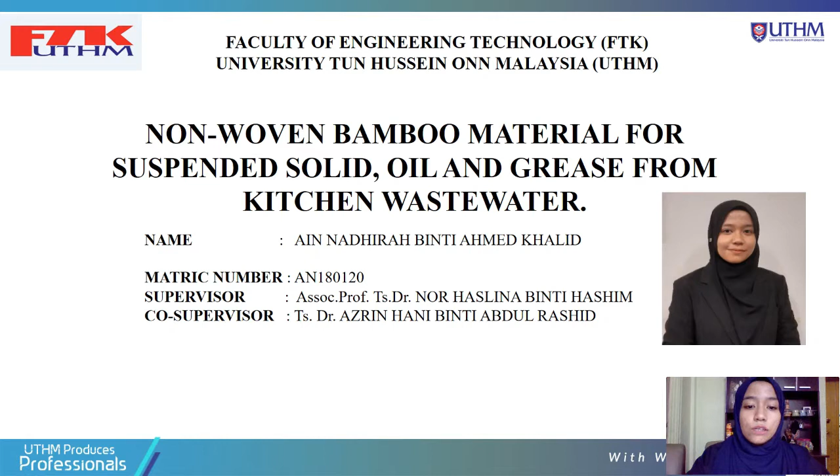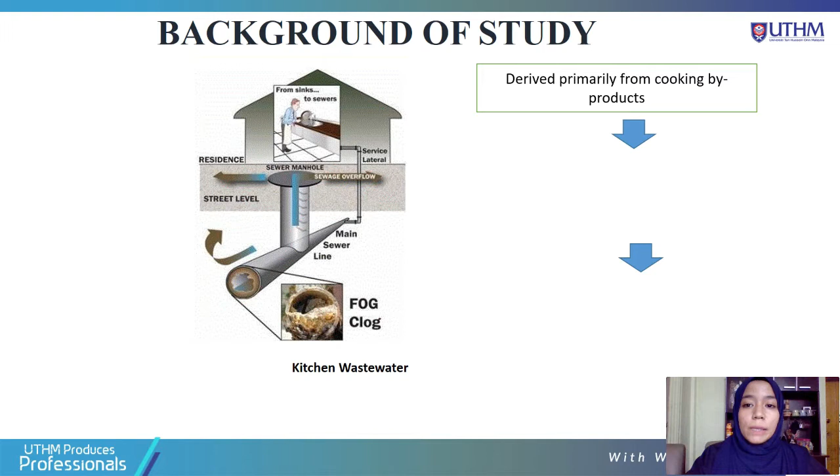For the background study, suspended solid, oil and grease are derived primarily from cooking byproducts. Without proper treatment, suspended solid, oil and grease will deposit and cause sewer blockage due to sanitary sewer overflow, land floods, and sewage pollution of water bodies. And it will affect human health and aquatic life.

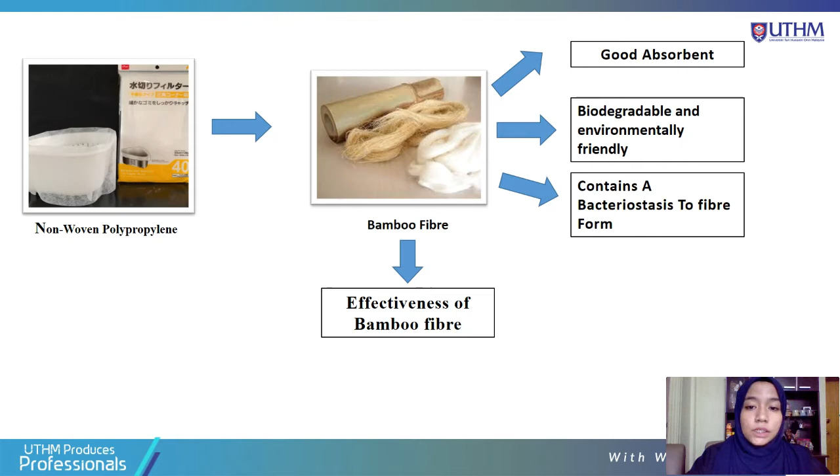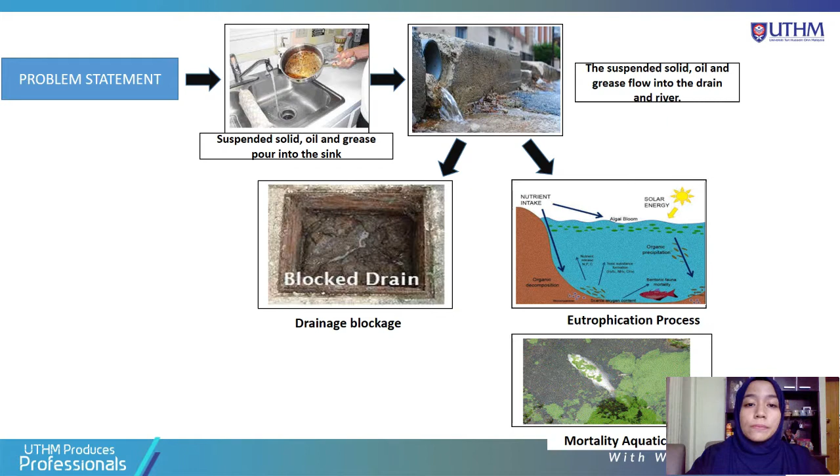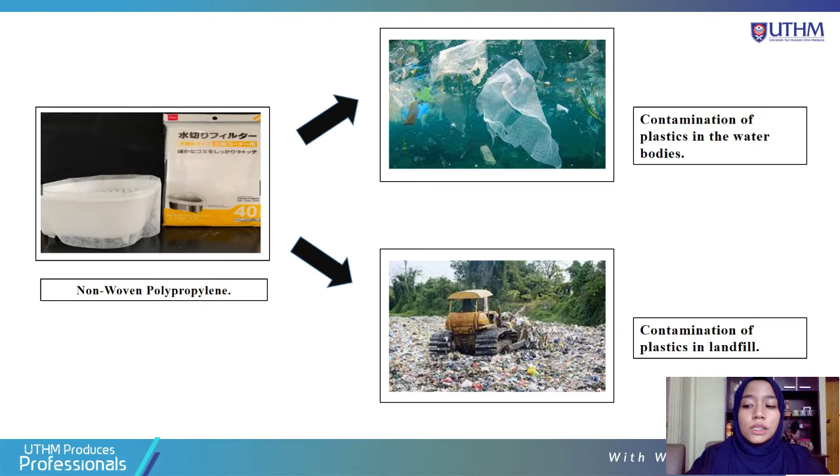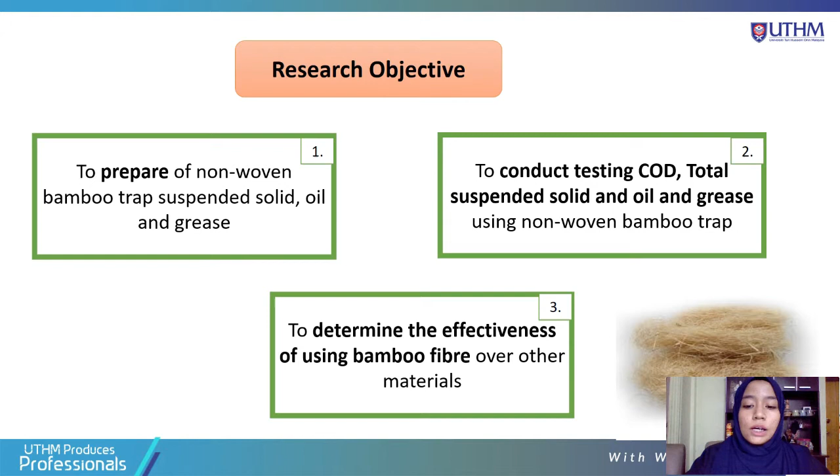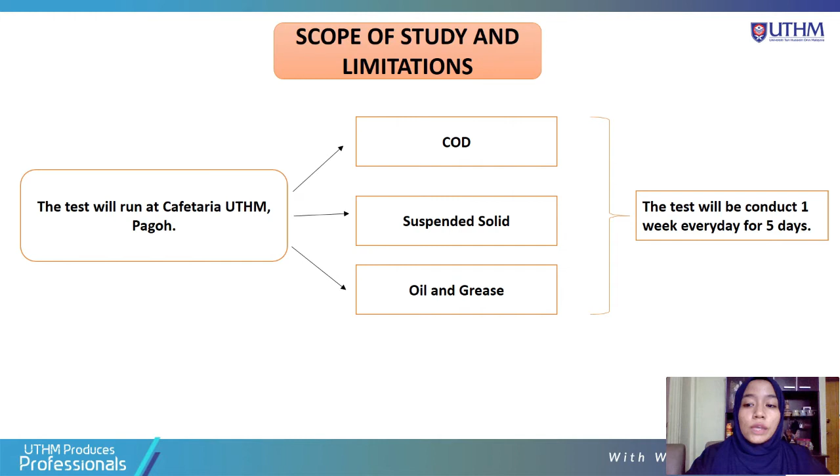For the scope of study and limitation, the test will run at Cafeteria UTHM, Pagoh, and the tests conducted are only COD, suspended solid, and oil and grease. And the test will be conducted every day for 5 days in one week.

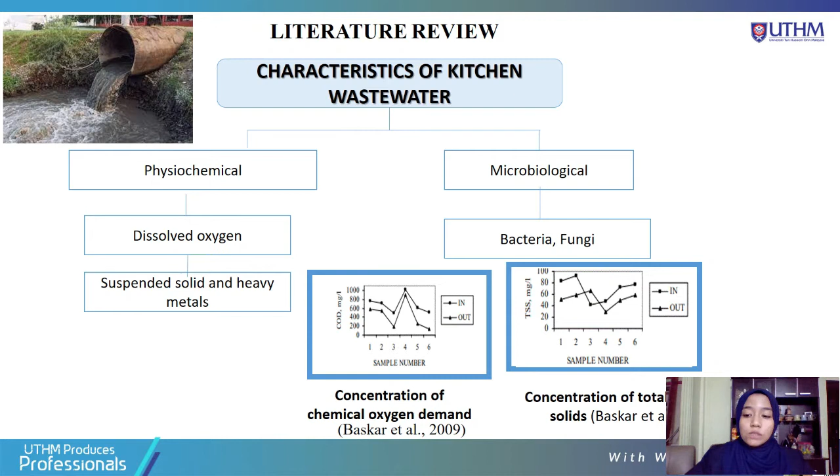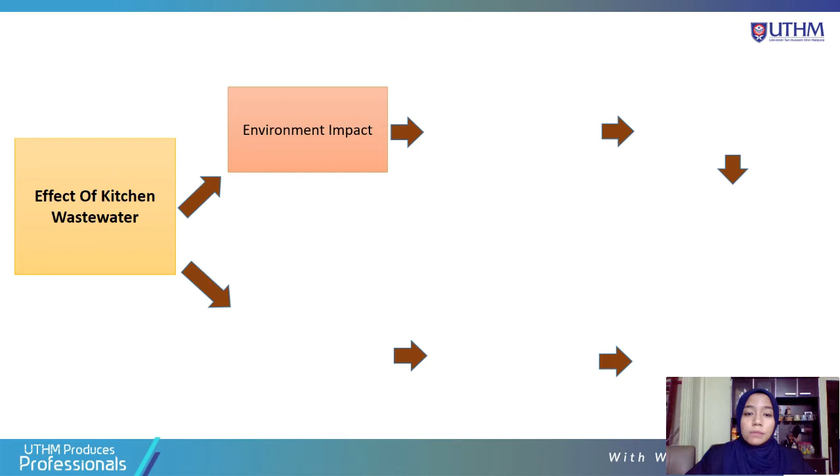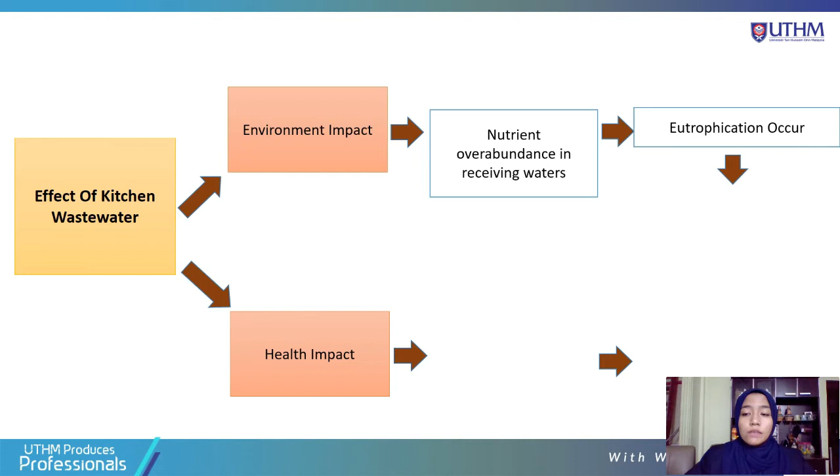For the effect of kitchen wastewater, we have two, environmental impact and health impact. For the environmental impact, it will cause nutrient overabundance in receiving water, such as nitrogen and phosphorus, and it will lead to eutrophication. When eutrophication occurs, there will be mortality of aquatic life, such as fish and plants. And for the health impact, when E. coli and Salmonella are present, they will cause diseases with symptoms such as vomiting and nausea.

For the pre-treatment of kitchen wastewater, how to conduct pre-treatment in the kitchen wastewater: first, use a suspended solid, oil and grease trap. Then, sort and remove the large debris. And the last one, never pour oil or fried oil down the drain line. So, this is an example of pre-treatment of kitchen wastewater.

So, these are the methods available for suspended solid, oil and grease, such as the Trapzilla supercapacity grease trap, Kabok fibre trap, Aqua Biopro, and BioWish Aqua.

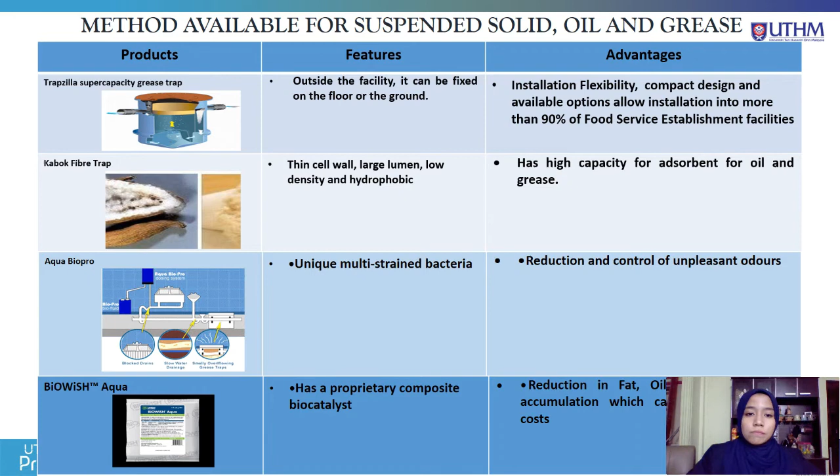So, what is the advantage of using a pre-treatment trap in the kitchen? First, it prevents suspended solid, oil and grease buildup. It avoids blockage in the main sewage pipe. Other than that, it's economical. It helps to save money on sewer maintenance and repairs. It also prevents the enterprise from temporarily closing due to odors or blockage.

And the last one is that it's environmentally friendly. It prevents nutrient-rich overspill into our waterways, providing a healthier atmosphere for future generations.

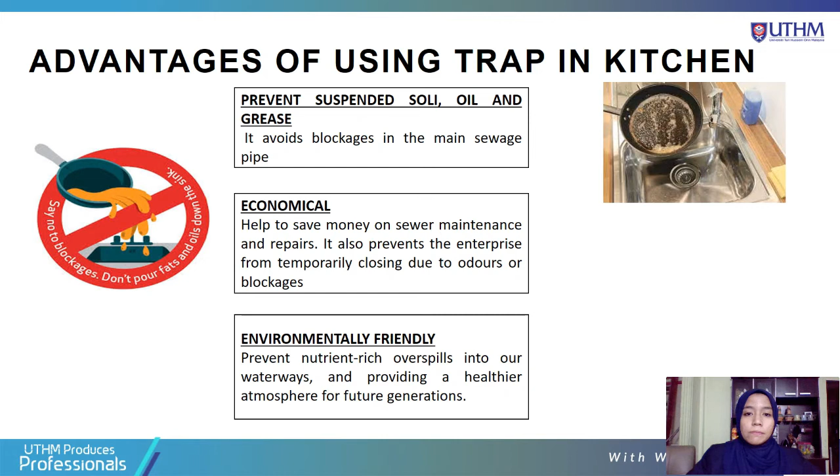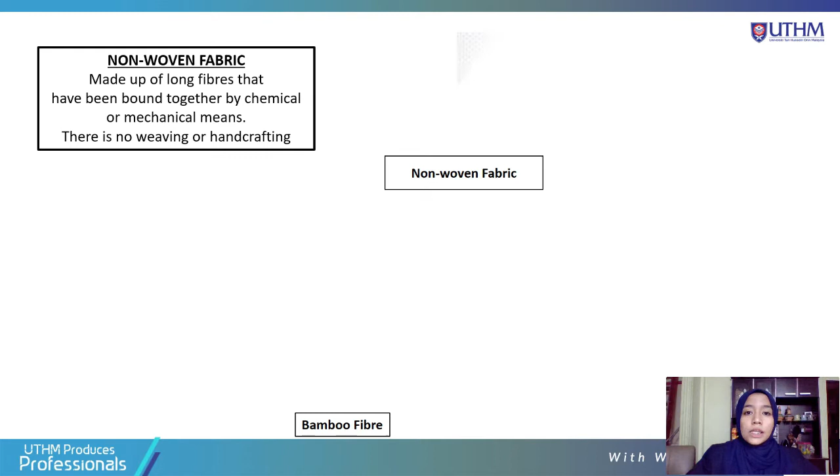So, in this project, I would like to produce a non-woven bamboo material for suspended solids or grease for kitchen wastewater treatment. So, what is non-woven? Non-woven is made up of long fibers that have been bound together by chemical or mechanical means. There is no weaving or handcrafting. This is an example of non-woven fabric.

What is bamboo fiber? Bamboo fiber is from bamboo plants that are cultivated spontaneously, and cellulose fiber manufactured from the pulp of the bamboo plants. The bamboo is a plant that can be cultivated in deprived areas, and it takes little time to mature.

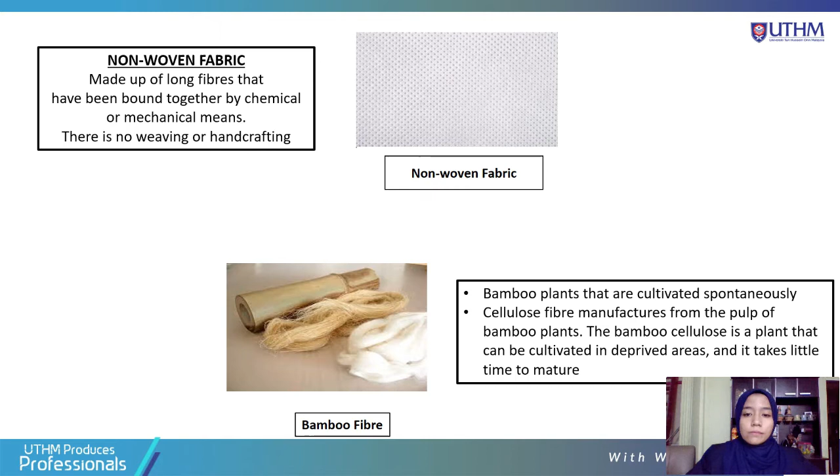So, what are the features of bamboo fiber? The first one, bamboo fiber is absorbent of UV radiation. Bamboo fiber contains sodium copper chlorophyllin. Other than that, it is biodegradable and environmentally friendly. It produces no hazardous waste and saves landfill space. Other than that, it contains bacteriostasis in fiber form. Bamboo has antibacterial qualities and includes natural antibacterial components.

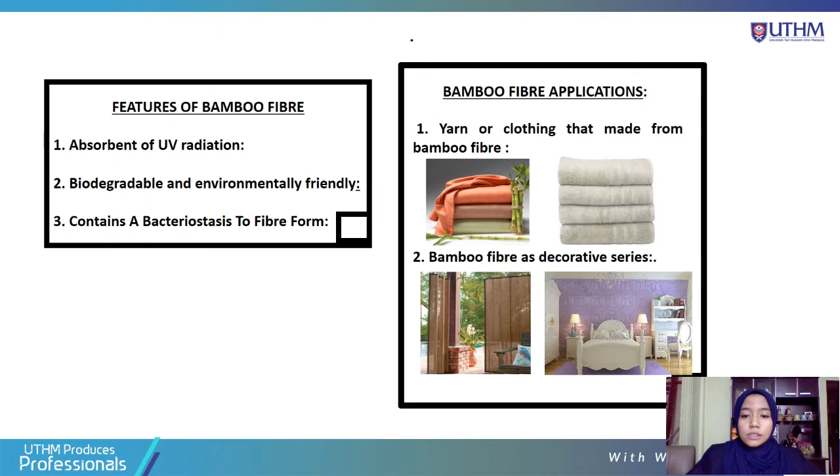So, what bamboo applications are available in the market? The first one is yarn or clothing made from bamboo fiber, such as towels, t-shirts, and others. Other than that, bamboo fiber is also used as decorative series, such as curtains and walls.

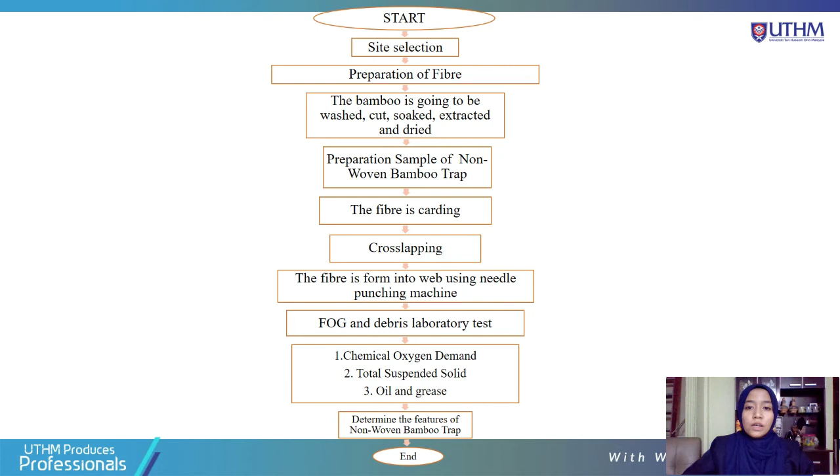This is the methodology of the process of non-woven bamboo material for suspended solids or grease for kitchen wastewater. Preparation of bamboo: first, the bamboo is washed, then it is soaked, then extracted, and the extraction goes further to the drying process. Preparation of non-woven bamboo: the fiber goes to the carding process, then cross-lapping, and the last process is in the needle punching machine.

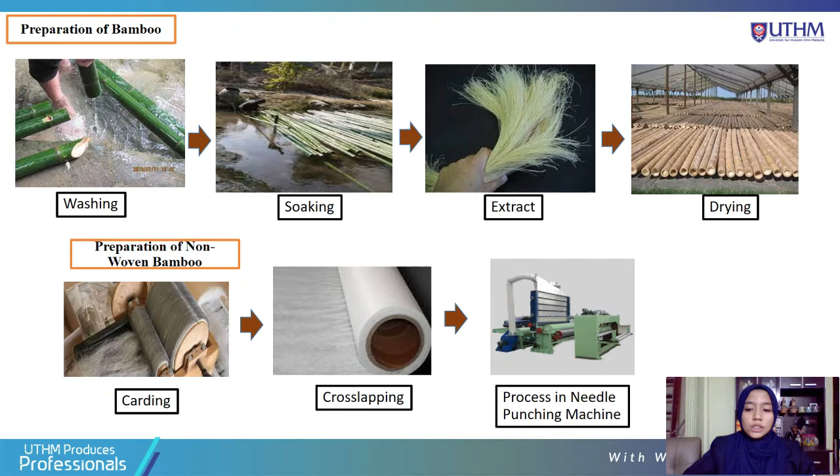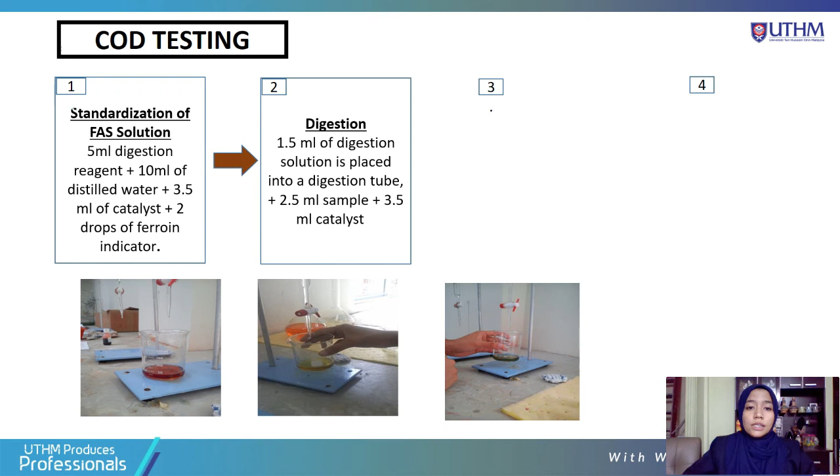In this research, we use COD testing. For the COD testing, the first one is standardization of FAS solution, the second one is digestion, the third one is titration, and the last one is we calculate the COD.

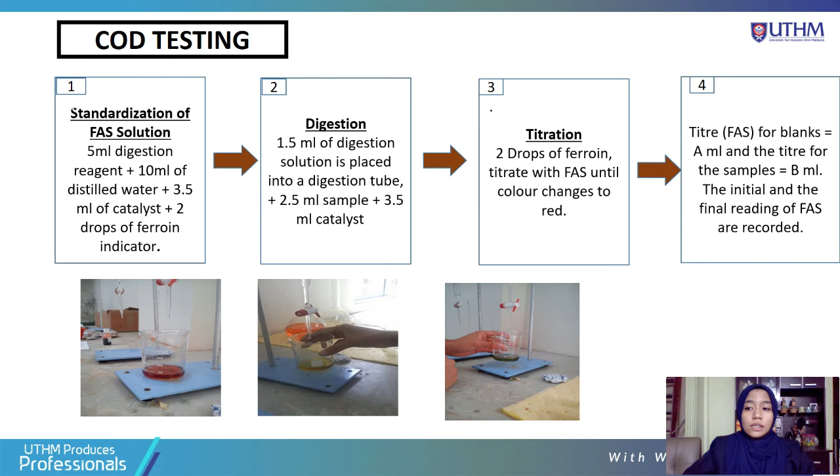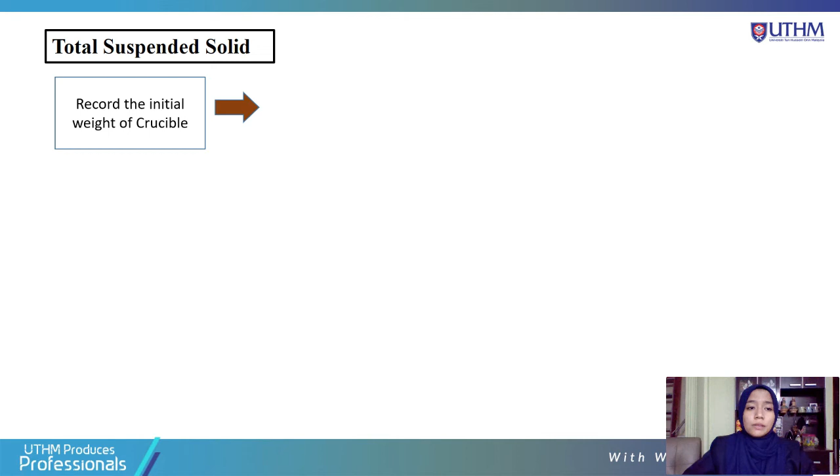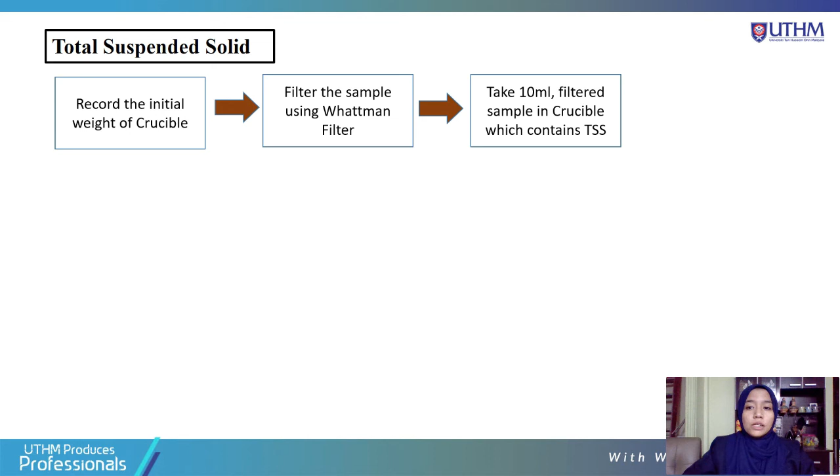For total suspended solids, we record the initial weight of the crucible, and then we filter the sample using Whatman filter, and then we take the 10 ml filtered sample in the crucible which contains total suspended solids, and then we place the crucible inside the oven to heat. Then we cool the sample to room temperature and record the final weight of the crucible.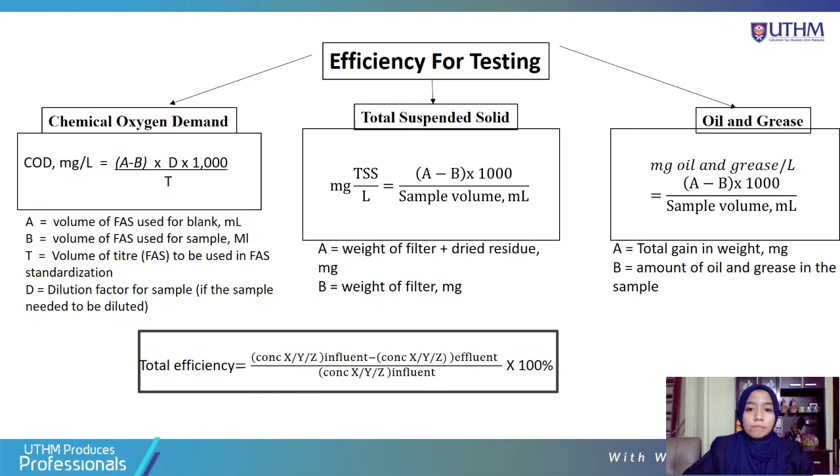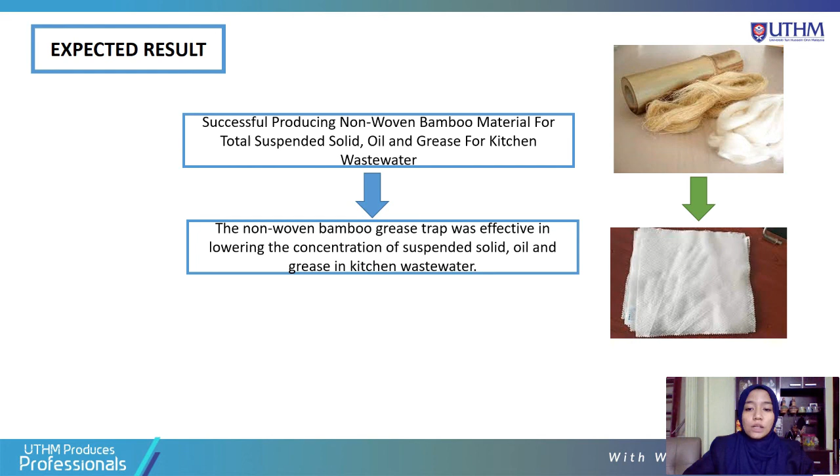So, for my expected results, the first one is successfully producing non-woven bamboo material for total suspended solids, oil and grease for kitchen wastewater. And the second one is, the non-woven bamboo grease trap was effective in lowering the concentration of suspended solids, oil and grease in kitchen wastewater.